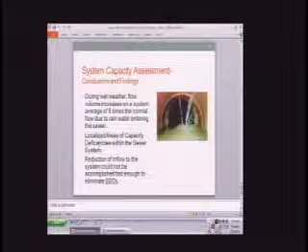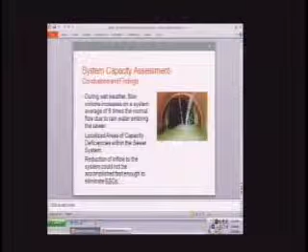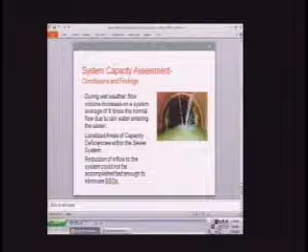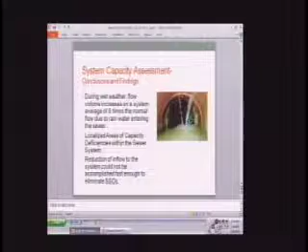For the capacity assessment, the way we conduct it is first we install these flow monitoring stations, and then we measure the flow during a rainstorm event. It could be a 1-year or a 2-year storm, and then based on that information, we calibrate the hydraulic model, and using the model, we predict what the actual hydraulic flow will be during a 10-year recurring storm. So what we find is that during wet weather, the flow volume in the sewer system actually goes up as much as 8 times the normal flow due to rainwater entering the sewer. As you can see in this picture, rainwater is entering from the top, going into the sewer main.

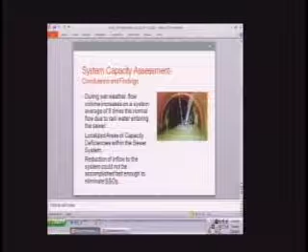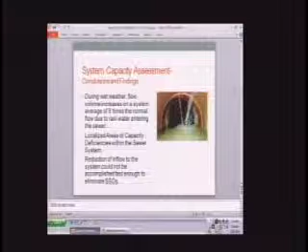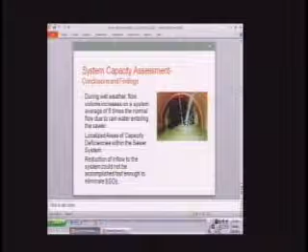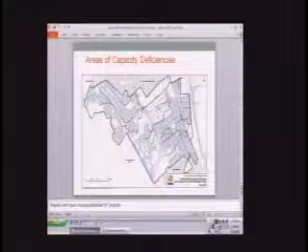There's also localized areas of capacity deficiency within the system. What we also determined is that the reduction of inflow to the system could not be accomplished fast enough to eliminate the sanitary sewer overflows. This slide shows the areas of capacity deficiencies, particularly the red areas, and they're pretty much localized throughout the entire system.

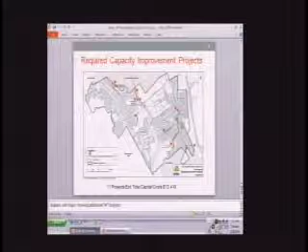What we came up with is a total of 11 capacity improvement projects, and you can see the locations here. The 11 projects also include one pump station improvement, but due to the insufficient capacity of the pump station, we included it as part of these 11 capacity improvement projects.

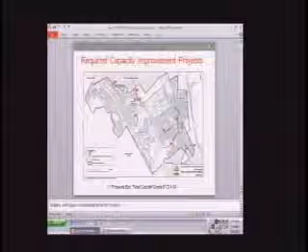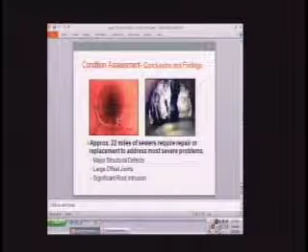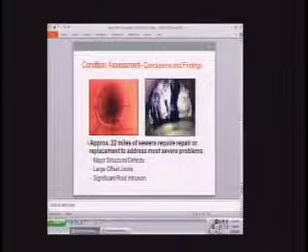The second focus area is condition assessment. What did we find? If we take a look at these pictures here, the conclusion is that we have approximately 22 miles of sewer mains requiring repair and replacement to address severe problems such as structural defects, large offset joints, and significant root intrusion.

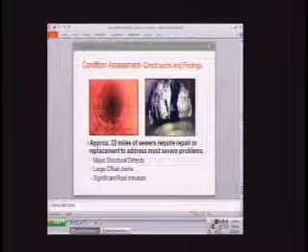In the picture here, on the left you can see a broken joint of the pipe, and on the right-hand side this is a picture of root intrusion. You can see the roots coming down into the pipe. Just imagine the sewage trying to go through this obstacle course - it's very difficult.

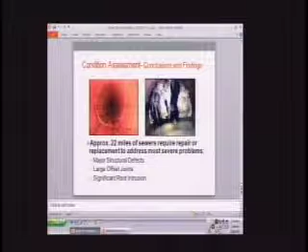The condition assessment also determined that there are an additional 12 miles of sewer repair or replacement needed to address maintenance issues.

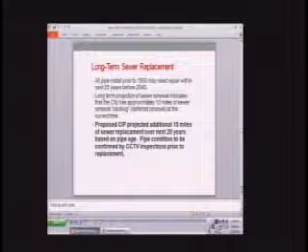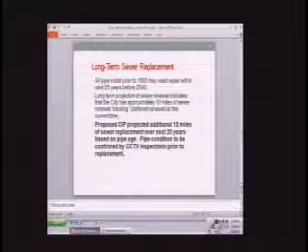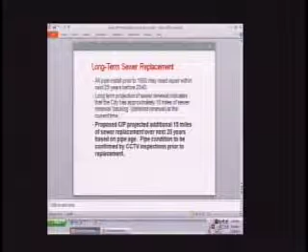Long-term sewer replacement, as part of the focus area, the master plan determined that the mean age of a sewer pipe within the city system is about 90 years. So, any pipe installed prior to 1950 will need to be repaired or replaced within the next 25 years.

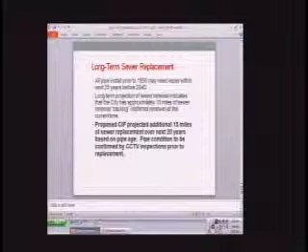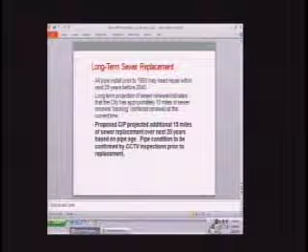Or before the year 2040. The current projection is that the city has about 10 miles of sewer pipes in renewal backlog. The proposed capital improvement project also predicted an additional 15 miles of sewer replacement over the next 20 years, based on the pipe age.

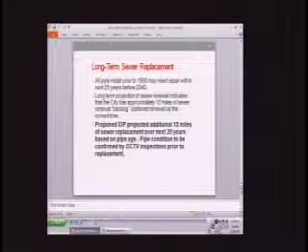Of course, before we replace these pipes, we're going to confirm the condition based on CCTV inspection.

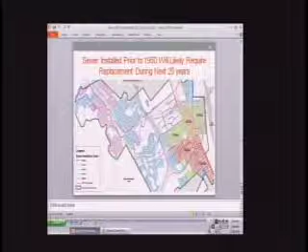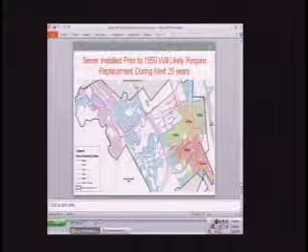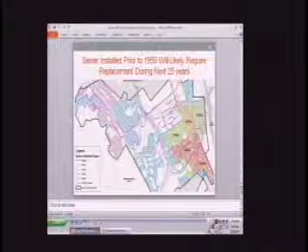This slide shows the location and age of the sewer system. On the right-hand side, you'll see the 1920s, 1930s, 1940s pipes, pretty much on the east side of the city. As mentioned earlier, all these pipes will potentially need to be replaced during the next 25 years.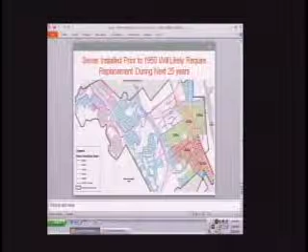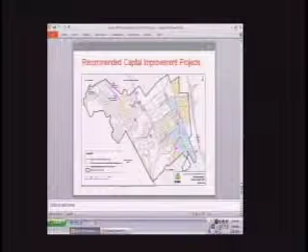Now this slide shows the overall recommended capital improvement projects. As you can see, they are pretty much throughout the city. And this is a detailed description of the project itself.

To look at these projects in a different perspective, the capital improvement program is consistent and in line with the 2011 rate study. The project includes capacity improvement projects, pump station improvement, rehabilitation based on condition assessment, and also rehabilitation based on the age of the mains.

Also, $4.5 million is allocated for spot repair contract and equipment purchase. As mentioned in the previous slide, total year 1 to 5, we plan on spending $26 million, and the total program over 20 years is $133.5 million.